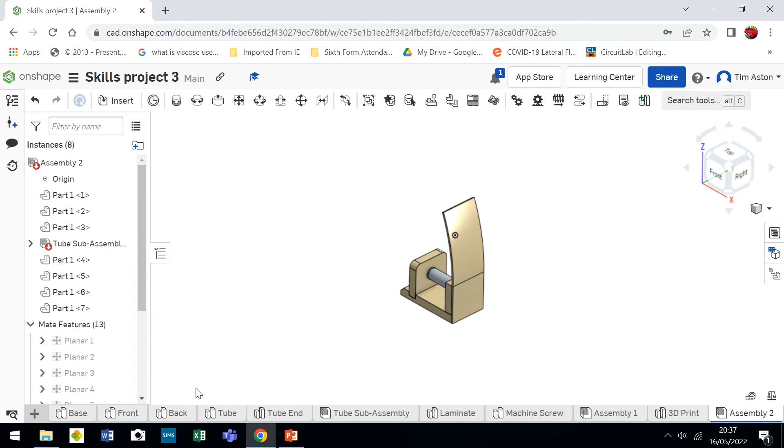So we're going to create our own orthographic drawing. We need to click the plus, create our own drawing and click OK; the default setting will be ANSI millimeters, and it will load up a blank page. Now this is a drawing that, typically, if you try to do it yourself on a drawing board by hand, would require a lot of precision and would take a lot of time.

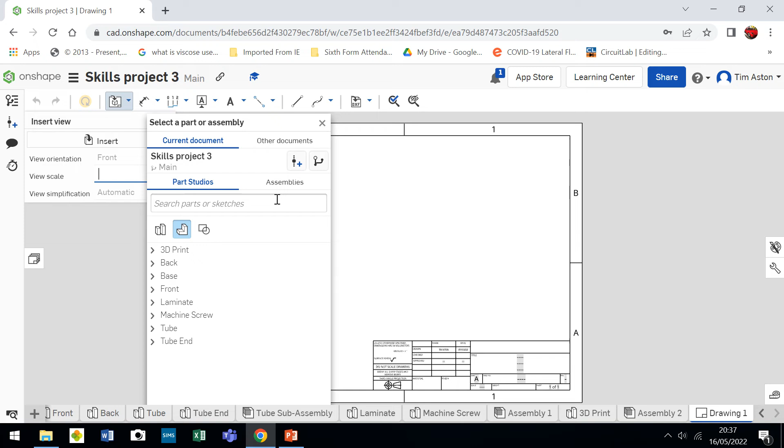This is really easy. I'm going to bring in my own assembly here, so the assembly drawing, and we're going to assume we're bringing in our front view here, and you'll notice it's bringing in that view there. That can be our side view, or our front view. I know it isn't quite our front view, but we're just going to assume it's our front view. And it's now ghosting in our side view. So left click to confirm that.

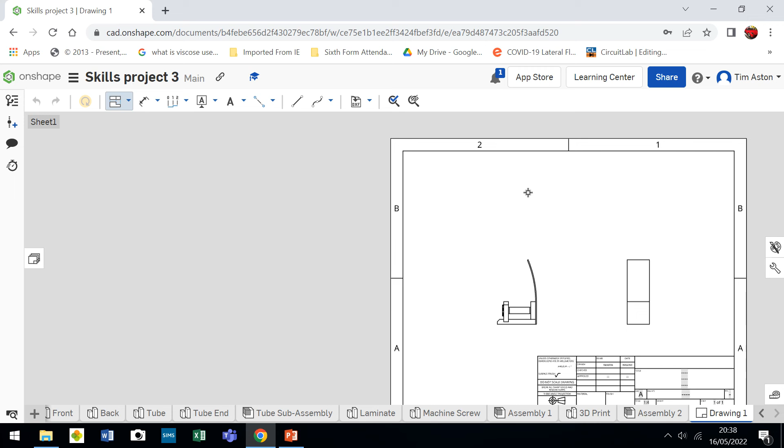And if I just left click there and drag our plan view from there, and just click on there, I'm going to drag in a 3D view here. And I'm going to escape to confirm those three views. So if you look at it now, our side view should line up with our front view, and it will just jump into place.

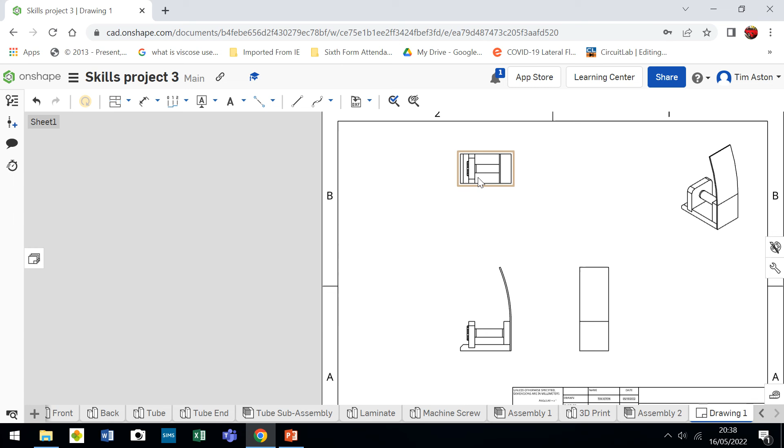In an orthographic drawing, it's really important that the side view lines up with the front view, and our plan view lines up with the front view. So I can move it around, and if I move it out of place, it will jump and move it back in place. I want to move that to there, and it will just bring it all together.

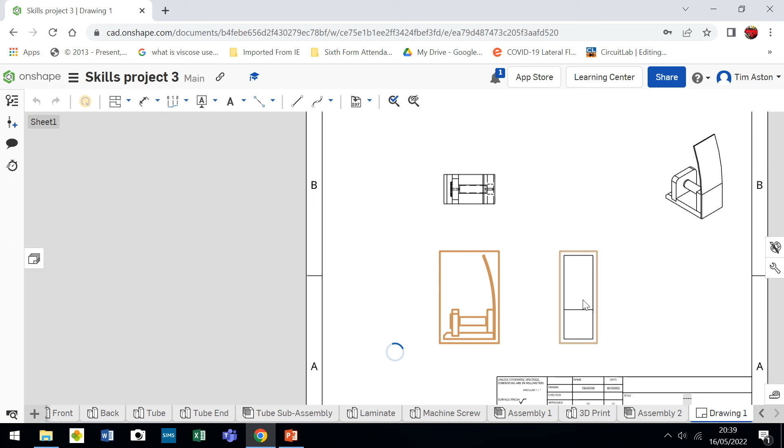Now, the really good thing about this is we can also add hidden detail. We can start to show the things that we know are there, but we can't see. So if I right click here and show hidden lines, right click here, show hidden lines, and right click here and show hidden lines. If I now zoom in, you can see lots of dotted lines. What they're doing is showing what we know is there, but we can't actually see.

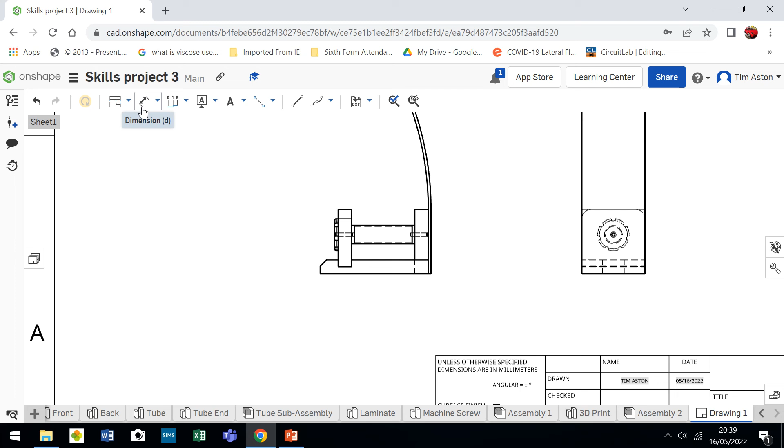And we're going to do it here as well. So we can see the thickness of the tube. We can see our machine screw in there. And what we can then do is add our own dimensions. Dimensions are sizes, and the dimensions will communicate how big the parts need to be. So I click a dimension and select the distance from there to there, and it will let me drag dimensions in.

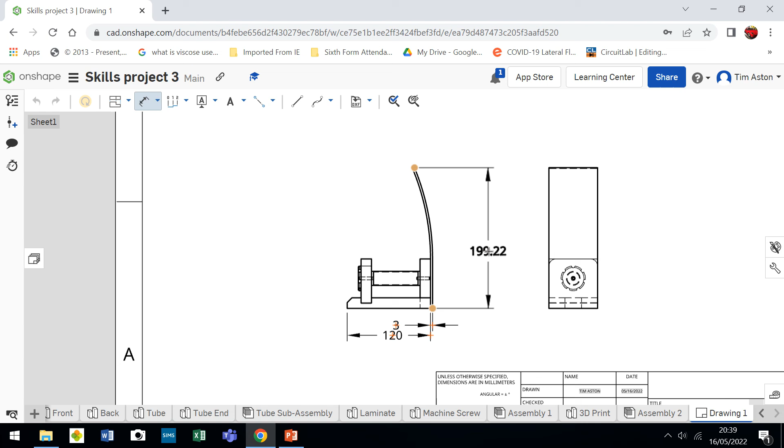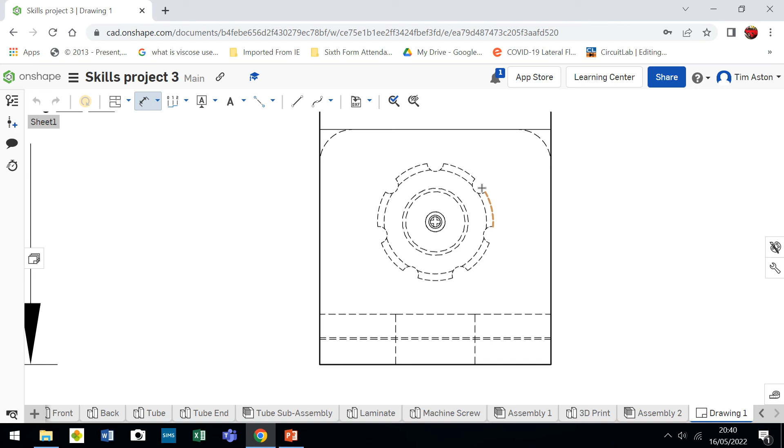And when you get going, I would like you to populate it with as many dimensions as possible that you think you would need to communicate your design or your part to a third party, like the thicknesses of the pieces of timber, from there to there, and the size of the tube, and so on. And you can add a radius dimension, so I can select the radius as a radius of 17.5 mil.

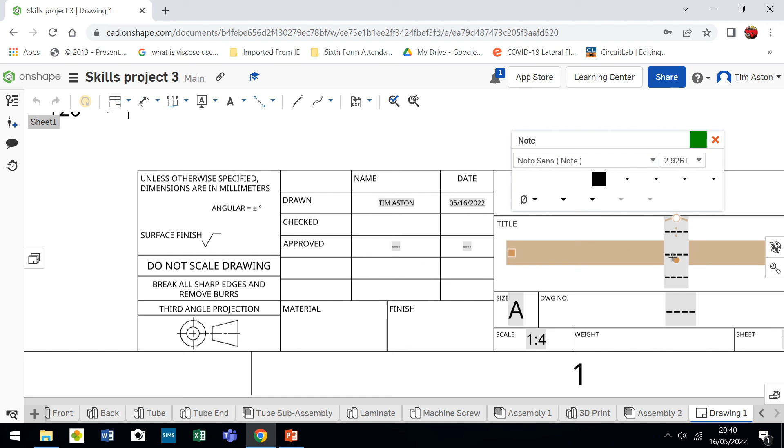And if you notice, it's got my name in there, it's got today's date, and if I escape, you can go to the title and change this. We're going to call this our skills project, SKILLS, and click return. It's already put it on sheet. It's got an automatic scale of 1 to 4. You could put the material, which is going to be pine.

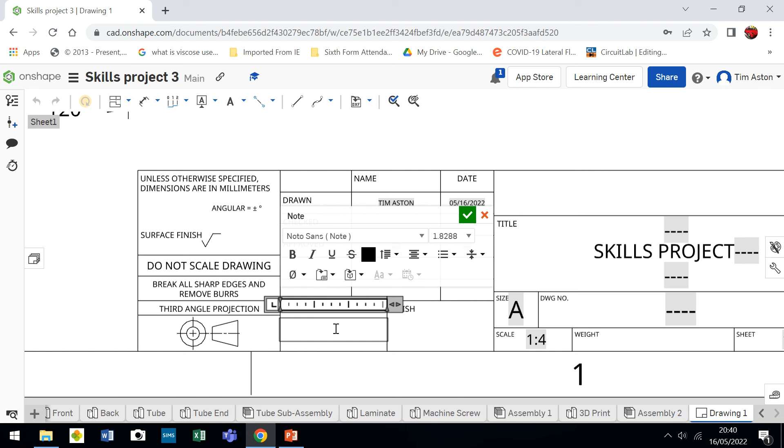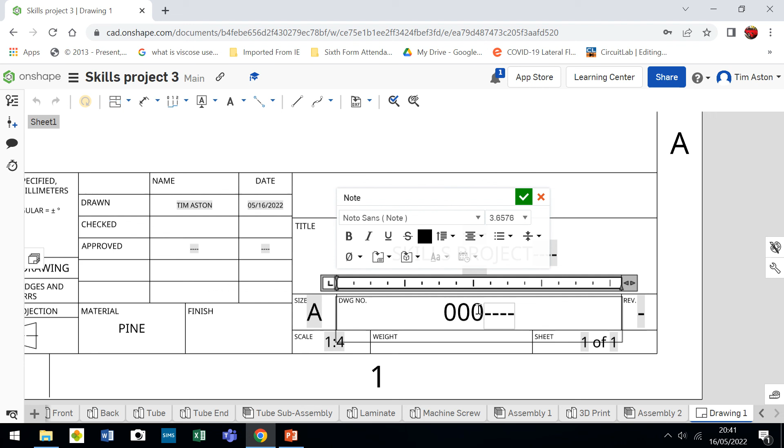And we're nearly there. So the next thing you might want to do is put a drawing number in there, 001. So I'd like you to have a go at bringing yours in and putting in as many dimensions as possible. Well done, off you go.